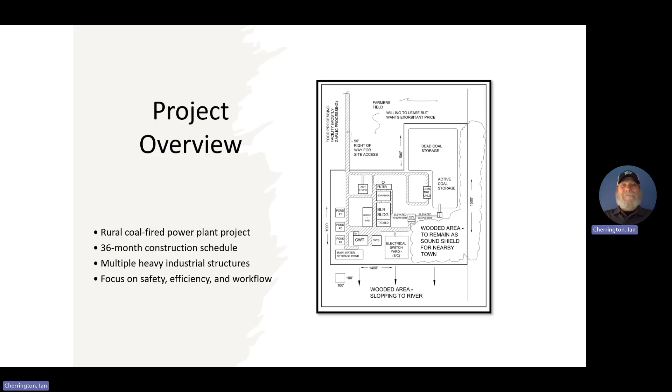My name is Ian Cherrington, and I will begin with an overview of the project and our overall site logistics strategy. Teton Power Plant Project is a large-scale industrial construction project with an estimated construction duration of approximately 36 months. The site includes several major structures, including a boiler building, scrubber systems, stack components, structural steel erection areas, temporary construction facilities, and multiple material laydown areas. Because of the size and complexity of the project, careful planning and site logistics is critical to maintaining safe operations and supporting efficient workflow throughout the construction process.

Our overall site logistics plan was designed around safety, efficiency, and controlled workflow. The layout includes controlled site access and perimeter security fencing that will help maintain job safety and regulate traffic entrance into the project. Material laydown areas were strategically positioned to minimize double handling and improve crane accessibility during major erection activities. Dedicated haul roads and traffic routes were added to separate heavy equipment movement from workforce activity areas whenever possible. The site was also organized to support efficient workflow movement between parking, office facilities, staging areas, and active construction zones.

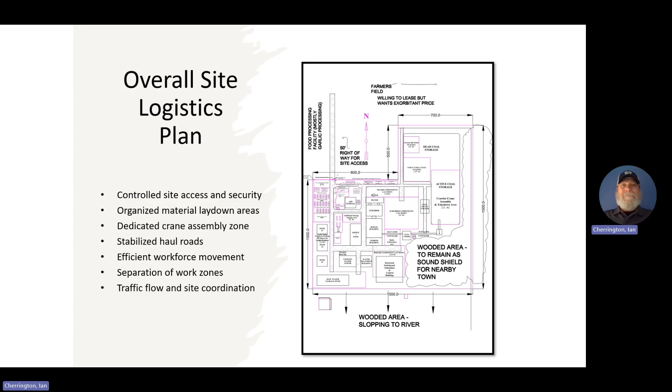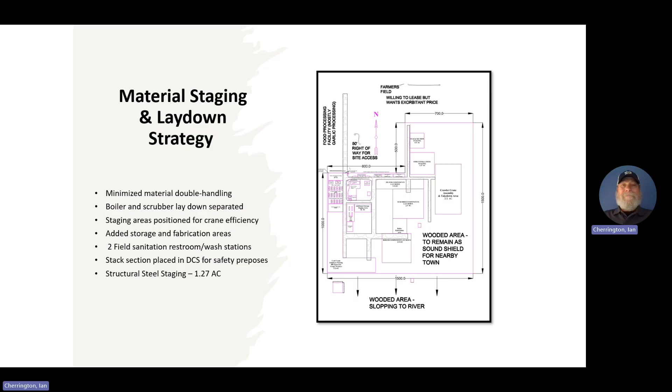One of the major priorities of the layout was organizing material staging and laydown. Structural steel laydown areas were positioned near erection zones to improve crane efficiency and reduce unnecessary material movement. Boiler and scrubber staging areas were separated to reduce congestion during critical installation activities. Additional fabrication and storage areas were included to support ongoing field operations. Field sanitation and wash station locations were also added to support workforce health and safety requirements. The stack section staging area was positioned in a safer, controlled area to improve handling and reduce conflicts with surrounding operations.

Temporary utilities and environmental controls are essential for maintaining safety and productive job site operations. Temporary power and water systems were positioned to support construction activities across the site while maintaining flexibility as the project progressed. A designated fuel station was included to support equipment operations and reduce unnecessary traffic movement. Environmental protection measures were also incorporated into the site plan, including SWPPP control, erosion protection, dust control measures, and concrete washout areas. These controls help maintain regulatory compliance and reduce environmental impact throughout the construction process.

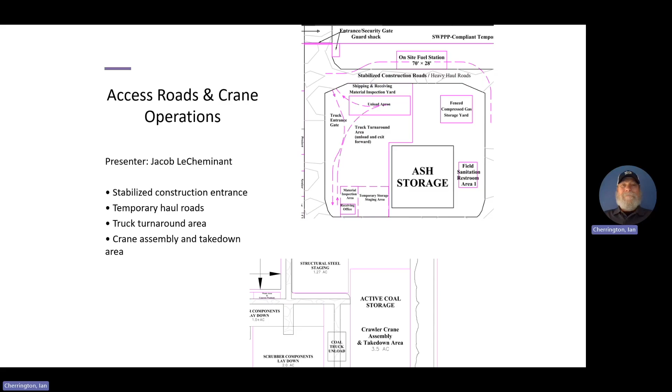Hi, I'm Antonio Walker, and I'm in charge of utilities and temporary facilities. We have made this one pretty straightforward. We've chosen to locate all of them to the north of the site, near the exit and entrance of our project. This gives everyone easy access to the facilities, especially for waste management purposes. This allows our waste management trucks to enter and exit easily and creates a safer site. As well, we have temp power and water brought in near the entrance so as not to cause a mess going further into the site. Again, this creates a safer site. Fuel stations are situated near the very exit. This will make it easier for our fuel trucks to get in and out quickly.

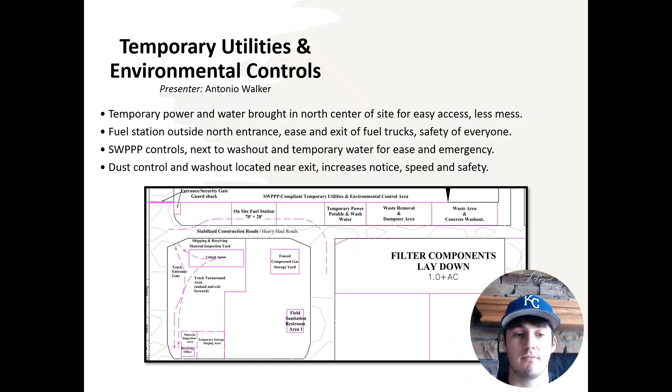And lastly, the SWPPP is located near the north. This makes it easier for our washout and for our temp water in case there's an emergency, and just having it all next to each other. And our dust control and concrete washout will be in one station right next to the other items. This makes it easier for our vans and trucks to clean off as they exit. It is easily situated and encourages everybody to stop by and clean and make the site safer as they are exiting so they don't miss it.

My name is Owen Telford. My section is material laydown and storage areas. So for this part of the site layout, we wanted to keep the large materials close to where they will actually be installed without blocking roads, crane access, or other work areas. The structural steel staging area is placed north of the main work area near the coal storage. That gives enough open space for steel deliveries and helps keep the steel organized before it is moved into place.

And the boiler laydown area is placed near the boiler building with a fabrication area close by. This helps reduce extra handling because the boiler is one of the larger parts of the project. The scrubber and filter component areas are also staged close to their install locations. This makes it easier to move materials into place when they are needed and helps prevent congestion around the site.

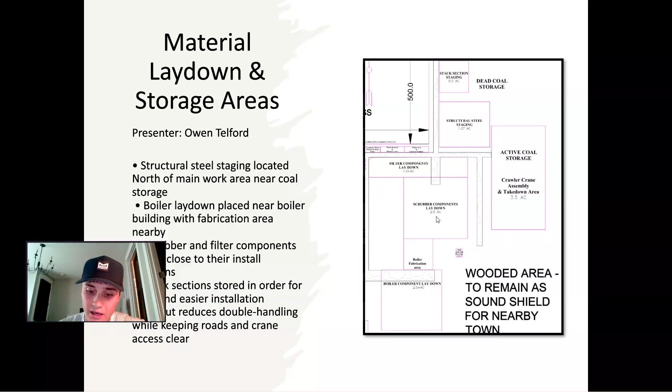The stack sections are stored in order so they can be picked up and installed more efficiently and safely. Overall, this layout helps reduce double handling, keeps materials organized, and supports better traffic flow and crane access throughout the project.

So I was in charge of the office complex and workforce facilities. My name's Cole Anderson. And to start off, we have all of the complexes over here on the left side of the project, right next to this main temporary road. And we have our offices that we will be using. It's 0.8 acres. And our main offices for management will be up here on the north side, and then just south of all those will be our offices and trailers for the trades and the superintendents of those trades.

And then above that, we have a main conference room so that we can coordinate daily tasks with all the trades and our managers and superintendents. And that can hold 40 to 50 people. And it's a 45 feet by 30 feet complex.

And then to the right of that and north of all the trailers, we have restrooms for the workers to use. And we also have two other restrooms located more in the center of the project, so when they're working, they can use the restroom over there. It's not shown on this map, but trust me, they're there. And then we have our management and visitor parking north of all of that.

And then just south, closer to the trade trailers, we have trade parking. All of our subcontractors will park there, and there's 400 spaces available. The only issue with this area is halfway through the project, we'll be putting ponds in this spot, and so that will take up most of this parking area.

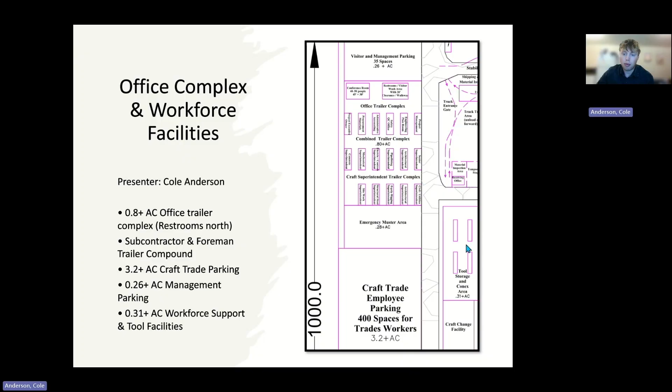So this section focuses mainly on safety and environmental planning throughout the project site. Security fencing is used around active construction areas to help control site access and improve safety. A stabilized construction entrance is included to reduce mud and debris from being tracked onto public roads by trucks and equipment. This site also includes SWPPP and erosion control measures to help manage stormwater runoff and protect nearby areas.

Traffic control was planned to keep workers, deliveries, and heavy equipment moving safely throughout the project. And environmental protection was also super important because of the nearby wooded areas and the river located next to the site. We just want to keep that naturally sound and safe.

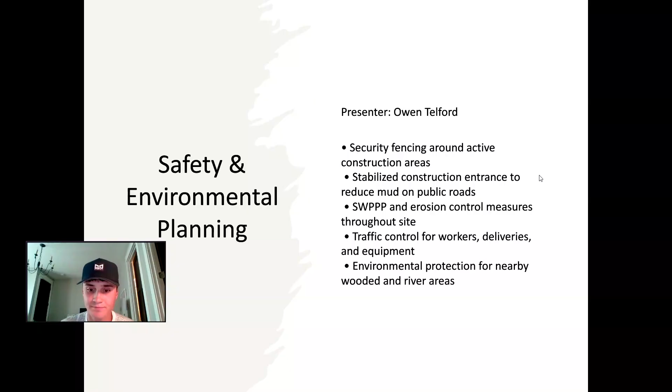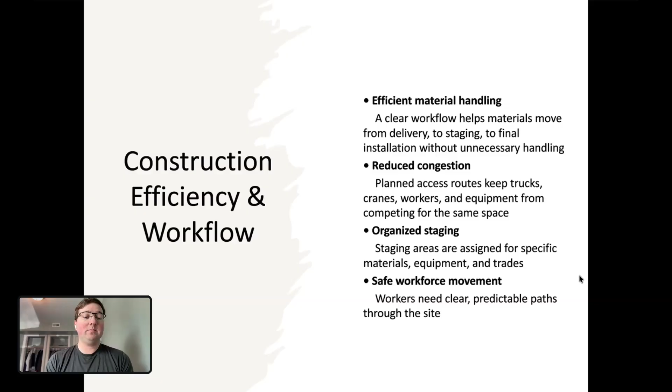Workers need clear, predictable paths through the site. Pedestrian routes will be separated from truck routes and crane activity when possible. Good circulation planning reduces conflicts between people, vehicles, and equipment.